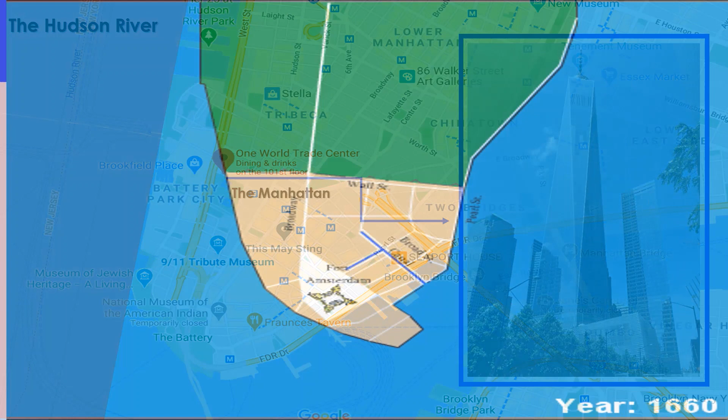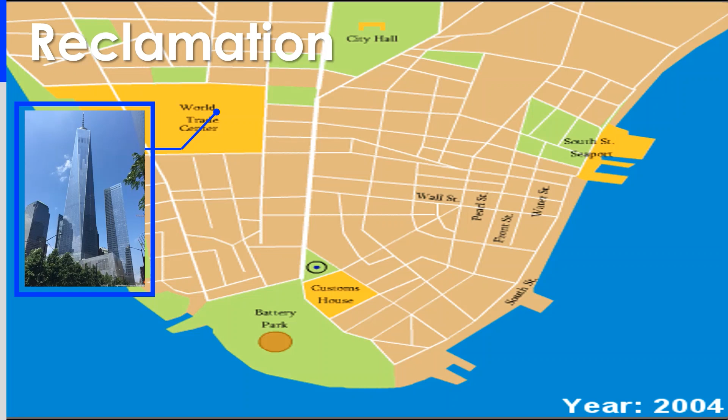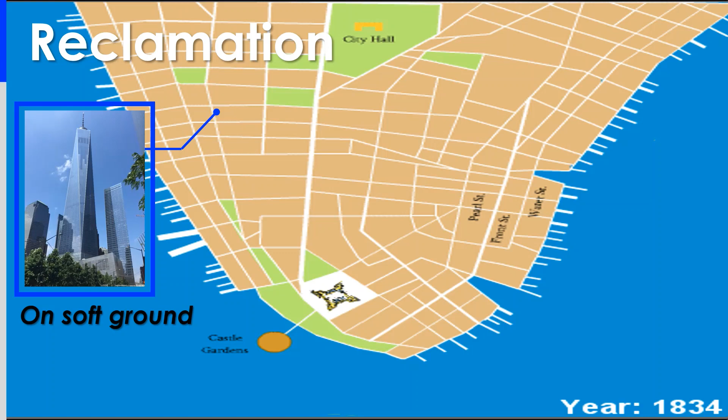That site has been expanded since 1660 due to continuous reclamation, and the One World Trade Center was built in the reclaimed area. In other words, the One World Trade Center had to be built on soft ground. Therefore, a special method was needed to build One World Trade Center. That was the bathtub. The bathtub came to be called so because the enormous concrete surrounding the site like the figure resembles the shape of a bathtub.

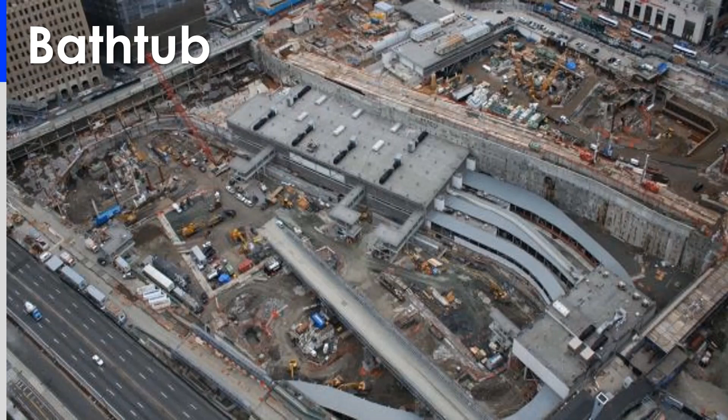The purpose of this concrete bathtub is to block the water, not to hold it like a real bathtub. So this huge concrete bathtub is actually an inverted bathtub. This bathtub was made using the slurry wall method. I will explain this slurry wall method by using the video.

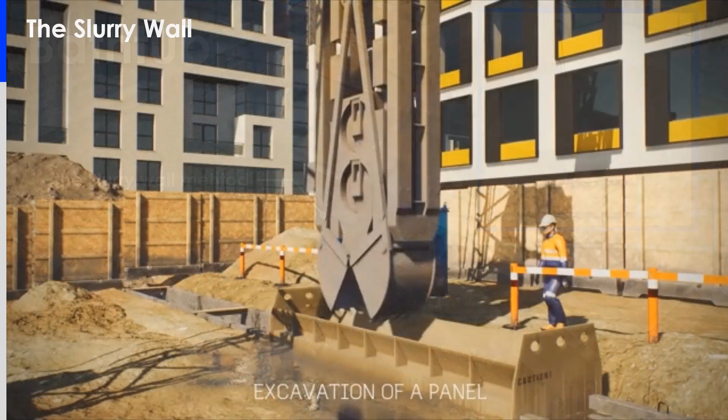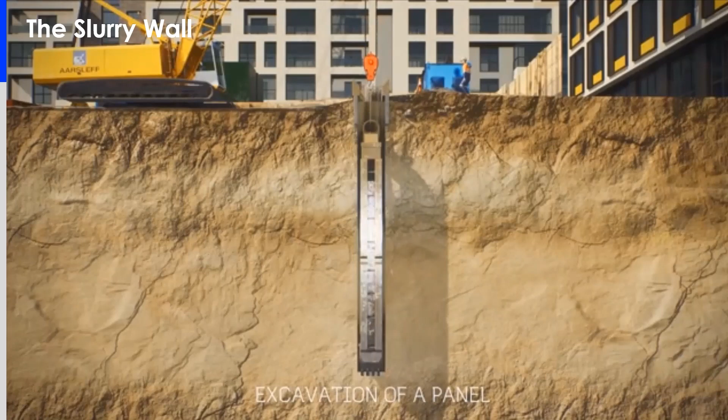Slurry walls are typically constructed by starting with a set of guide walls, typically 1 meter deep and 0.5 meter thick. The guide walls are constructed on the ground surface to outline the desired slurry trench and guide the excavation machinery. Excavation is done using a special clamshell-shaped digger as shown in the video, or a hydromill trench cutter. The excavator digs down to design depth for the first wall segment.

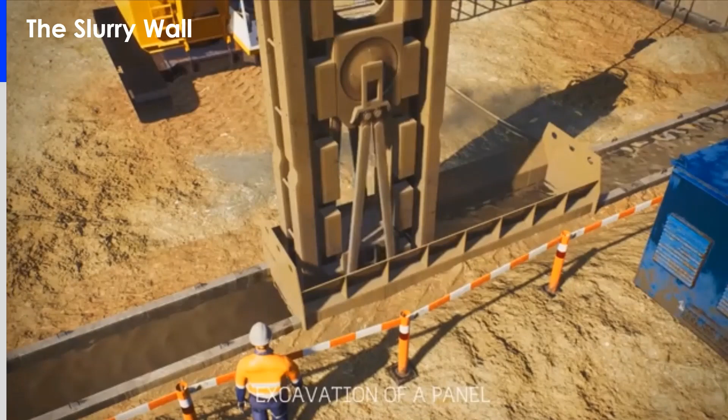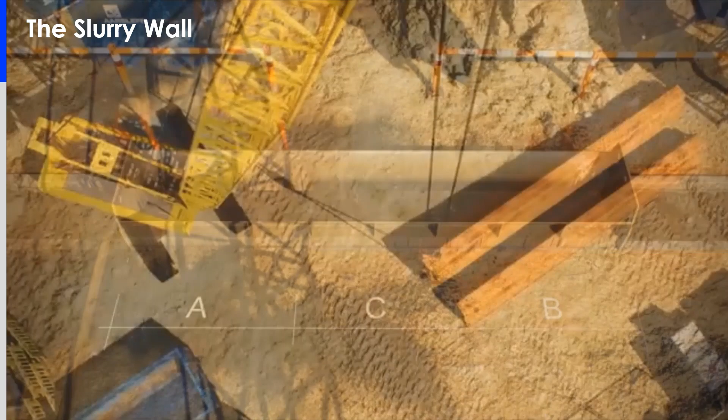The excavator is then lifted and moved along the trench guide walls to continue the trenches with successive cuts as needed. This slurry wall cannot be constructed continually for a very long section due to limitation and size of mechanical plant. The wall is usually constructed in alternate sections like the ABC sequence shown in this video. Finally, insert reinforcement and place concrete to form the wall panel.

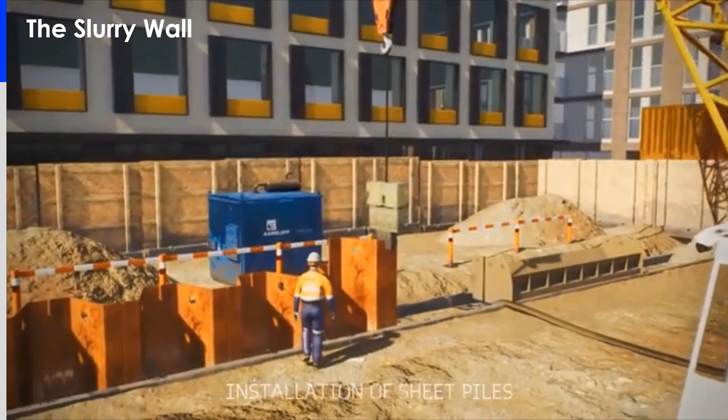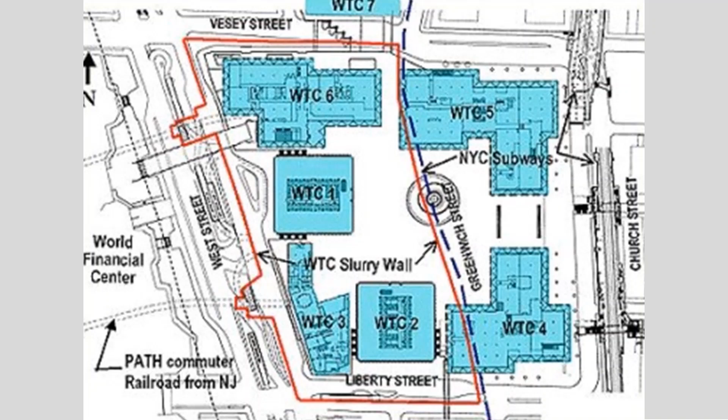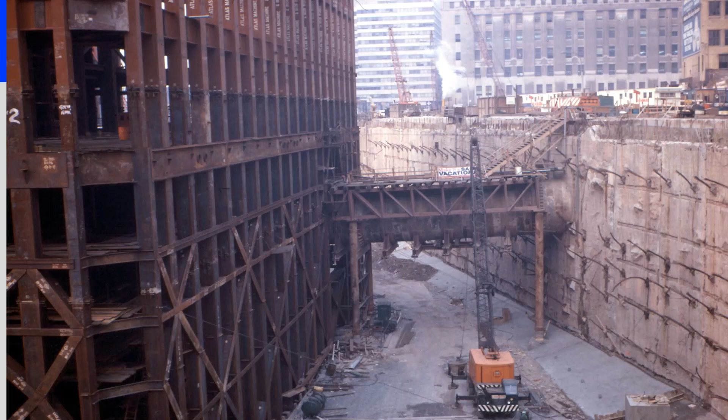Through this process, it was excavated from 70 feet underground to bedrock into a 9-block area below the World Trade Center site as indicated in red, and surrounded by a 3-foot thick reinforced concrete wall. Before the One World Trade Center was erected, this bathtub existed with the World Trade Center. It occupied about 65,000 square meters. The picture above shows the past of the bathtub from the northeast of the World Trade Center in 1969, before the 9/11 terror. The red mark is the slurry wall.

Therefore, the recovery of this bathtub was a major concern after the disaster. The collapsed structure destroyed a large portion of the slurry wall. Nevertheless, the wall could stand still because of debris acting as tiebacks. The restored bathtub now boasts a new concrete lining that further reinforces the original walls. Considered a symbol of resilience, parts of it are exposed at the September 11 National Memorial. So far, I've talked about the slurry wall.

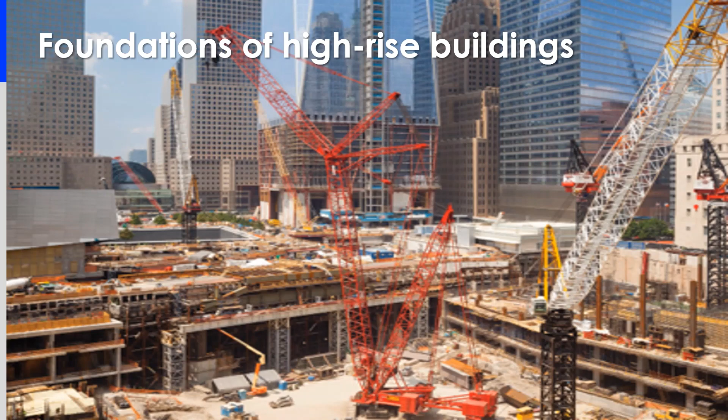Next, let's look at another foundation used in One World Trade Center. The foundation of high-rise buildings, such as One World Trade Center, must support very heavy loads. At this time, three foundations are mainly used: caisson, floating, and pile.

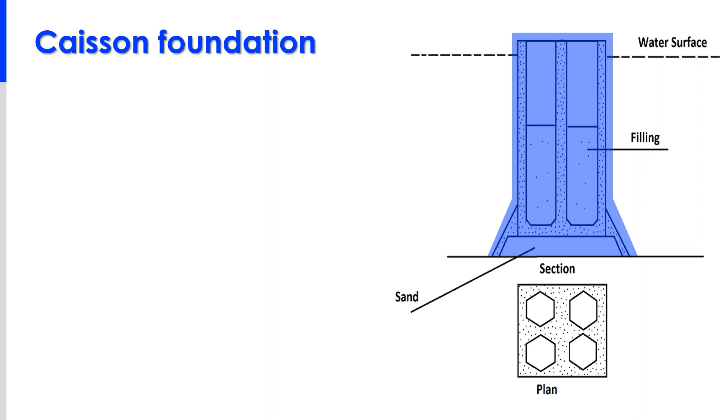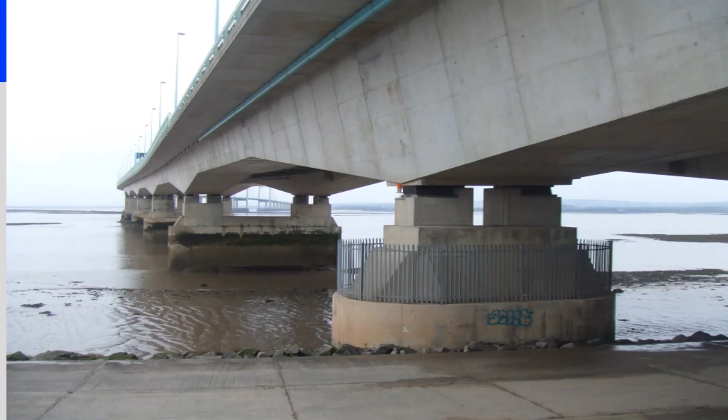Caisson foundation is a form of deep foundation which is constructed above ground level, then sunk to the required level by excavating or dredging material from within the caisson. It is often used in the construction of bridge piers and other structures that require foundations under rivers as well as other bodies of water.

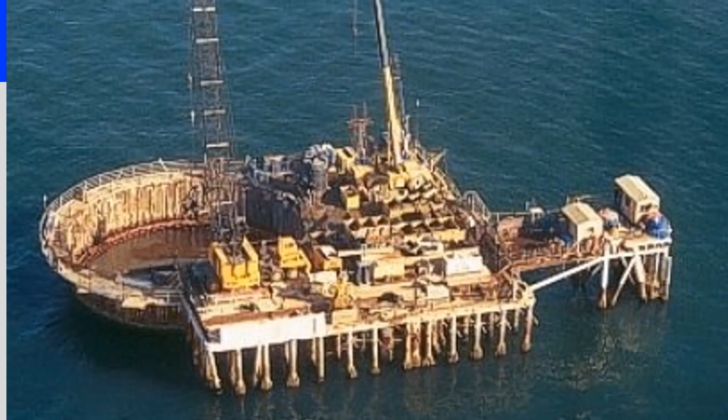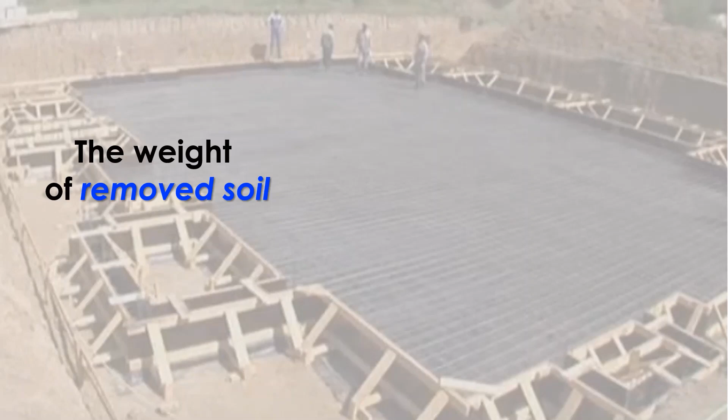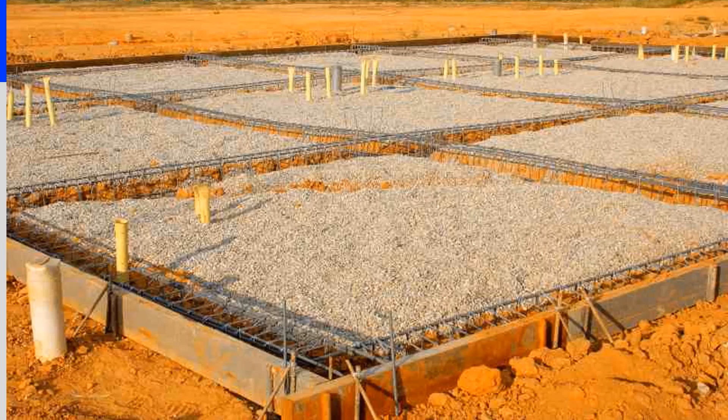Next foundation is the floating foundation. The main principle of floating foundation is to balance the weight of removed soil by a structure of same weight, which causes zero settlement to the structure. Accordingly, floating foundation floats on the ground, creating a moisture barrier between the ground and the structure. Therefore, it is mainly used in moist land.

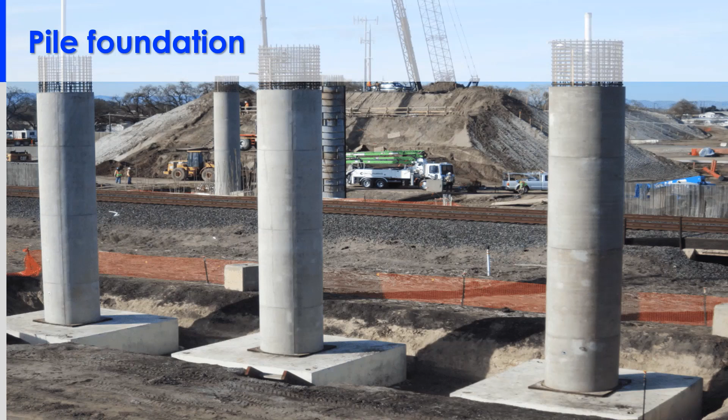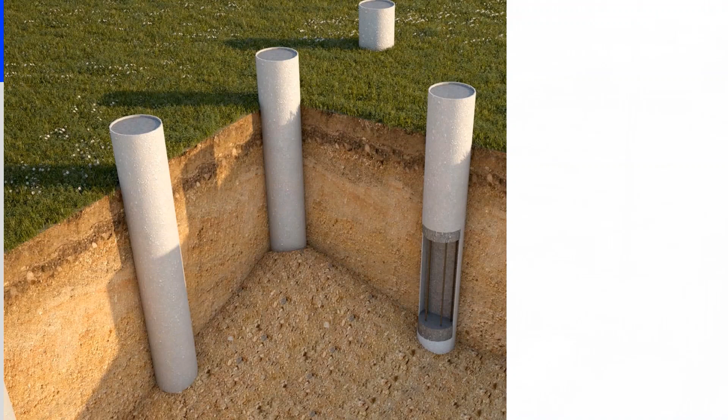Lastly, pile foundations are used as the foundation for high-rise buildings. This is the foundation used in One World Trade Center. The pile foundations are formed by long, slender elements typically made from steel or reinforced concrete or sometimes timber. These pile foundations transfer the loads from superstructures onto stronger and stiffer soil or rock at depth.

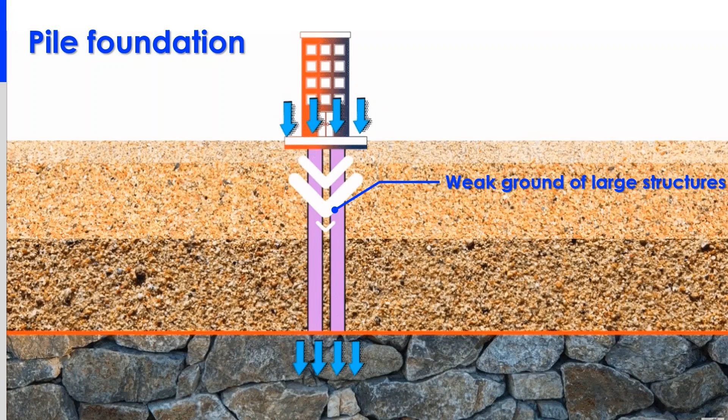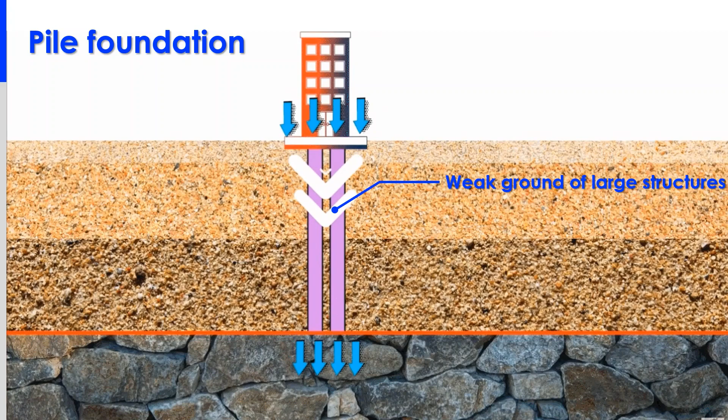By this principle, pile foundations are usually used when the ground is weak to support large structures. Therefore, this foundation was used on One World Trade Center sites, which were weakened by reclamation. If you look at the pile foundation at One World Trade Center, you can see that it stretches as deep as 20 meters below the ground.

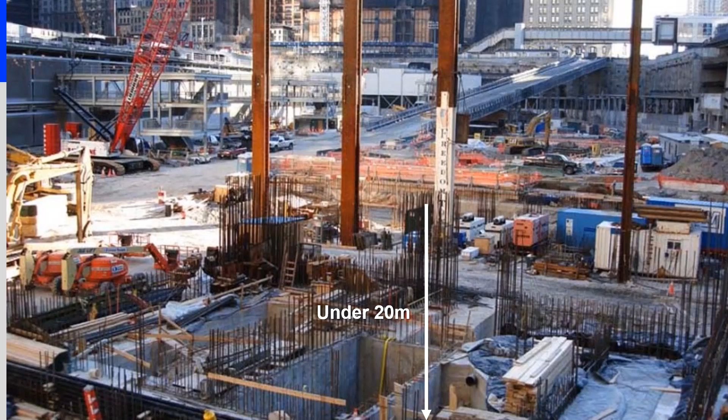Because a large scale One World Trade Center should be built on such a weak land, huge slurry walls and pile foundations were used up to 20 meters below the ground. In addition, to make the building stronger, engineers also paid attention to the One World Trade Center core. So, let me talk about the core of One World Trade Center.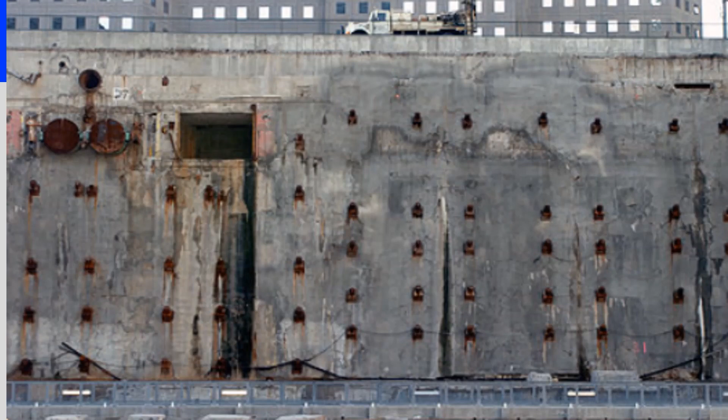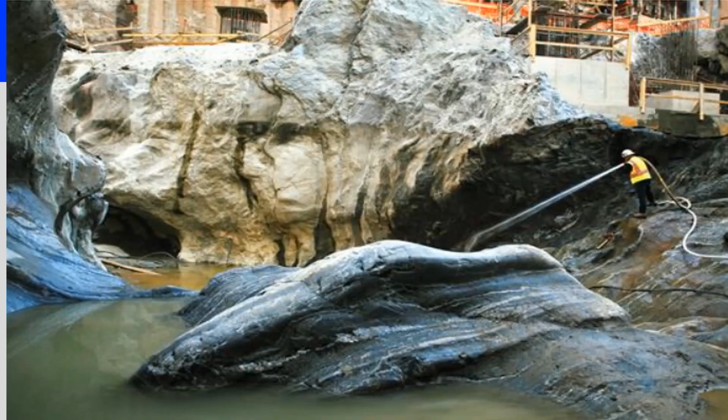As I mentioned, due to the scale of the building and 24-meter depth of slurry wall, pile foundation was used. In order to use the pile foundation, the ground was dug from the bottom of the slurry wall to the bedrock using an explosion. From there, concrete footings were set with 180 of 80-foot long and 3.5-inch diameter steel bars. These bars were tensioned to a load of 600 kips to anchor the building.

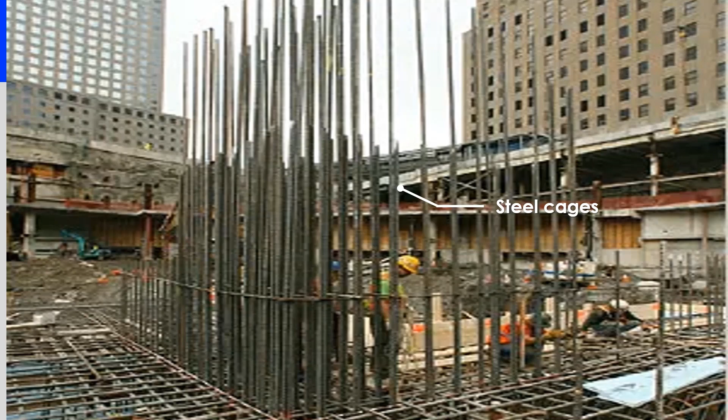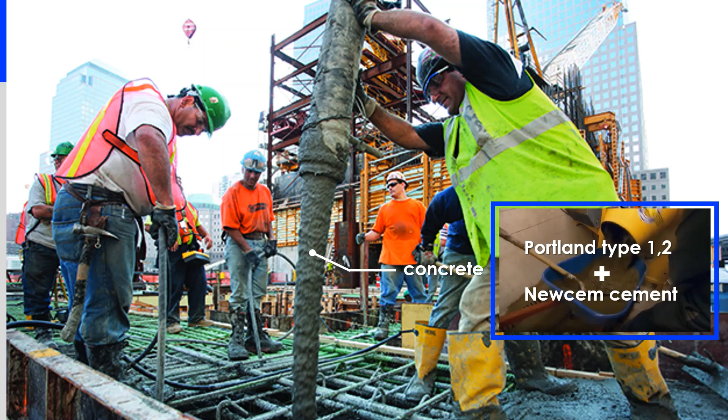Then the steel cages were filled with concrete, making the building's core. As you expected, the concrete wasn't normal. It was reinforced concrete, mixed with Portland Type 1,2 and Newcem cement, which can hold up to 14,000 pounds per square inch. It means that 1,000 normal adults can stand on a 4-inch diameter cylinder. The core consists of this super strong concrete and sophisticated steel frame continued from the foundation to the top of the building.

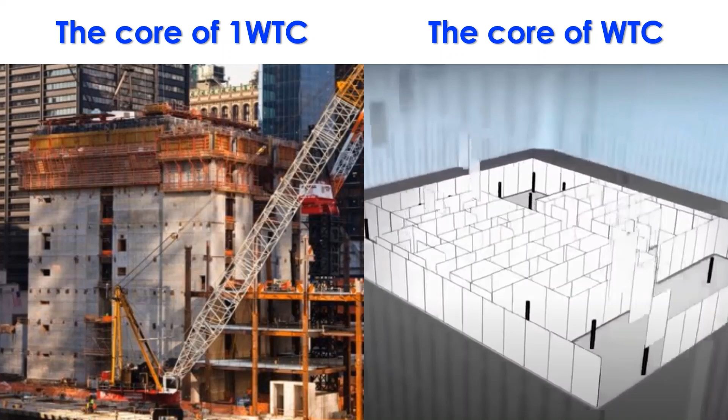Compared to the former Twin Towers core, which was made from steel columns and thin sheetrock, the One World Trade Center's core has 6-foot thick walls, so it can withstand collision. The most interesting part of the core is that it's built like a fortress. The core has a windowless concrete floor of 56.69 meters.

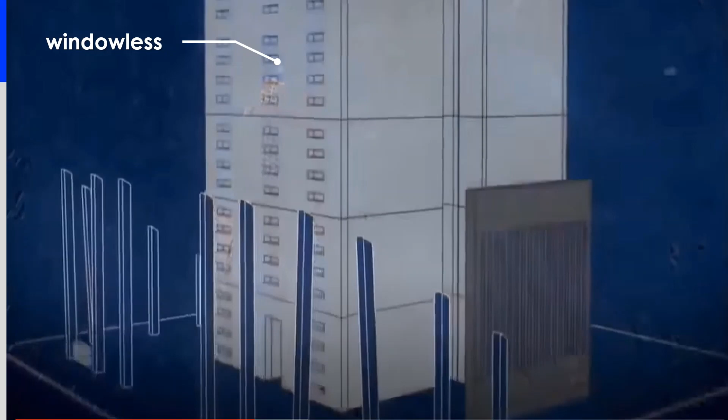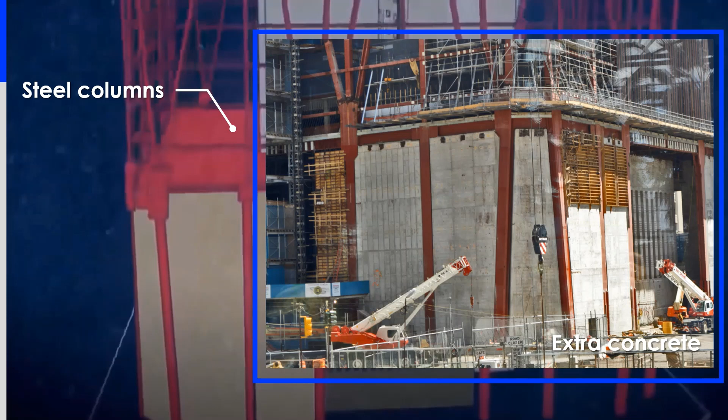This huge and thick concrete core is surrounded by large steel columns and is built with extra concrete between each column. This is for protecting the building from truck bombs and other terrorists in order not to repeat a disaster like September 11. In addition, the stairs and elevators inside the core are protected by a double layer of thick, sturdy concrete to help people get out of the building safely in the event of a disaster like before.